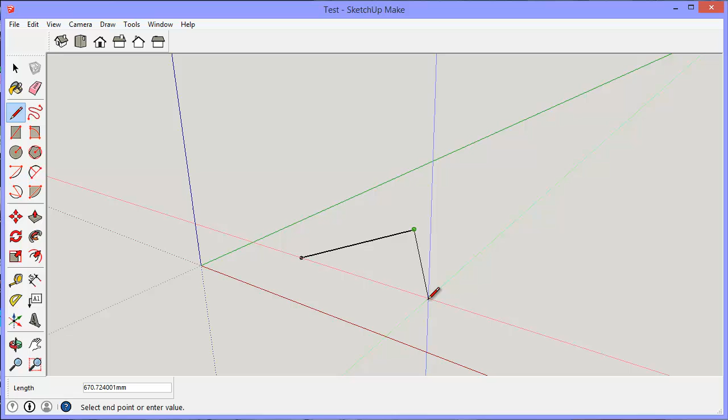Okay, looking at the pencil tool, I want you to consider some shapes here. I'm going to draw a kind of triangle-y sort of shape. You can see when I finish that last dot, when I click back on the green dot, it seals that shape in and it fills the middle with grey.

If I do something similar, but I don't actually finish the line and I press escape, you can see that the centre of this doesn't get filled with grey. The difference is that this is viewed as a complete face, a side, a piece of something. This one is just a line with nothing inside it. So if I wanted to do a push-pull here, I could make this into a three-dimensional shape. This one, I can't do anything with. You can see when I hover over it, there's a little no-arrow thing saying I can't do that.

So that's no good. You've got to make sure that the shapes you're drawing are sealed shapes. Okay, let's get rid of these. I'm going to show you two different ways. I'm going to get rid of that one by highlighting the whole thing and pressing delete.

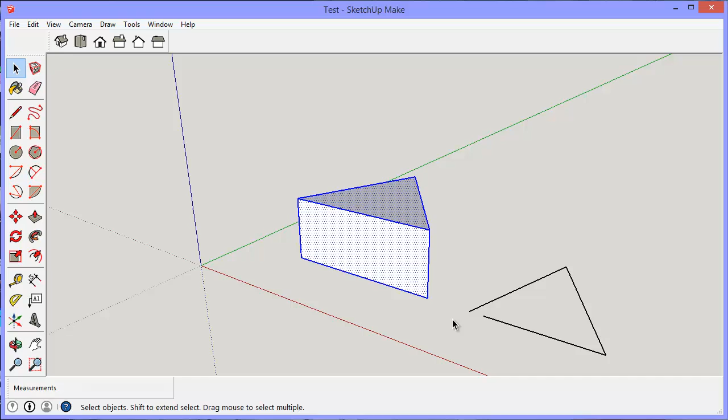This one, if I wanted to just get rid of a particular line, I can use the eraser tool and go over a line. Now it might be that I wanted to join these other ones back up again afterwards. So I could come back and finish off that shape, and now that's a solid shape. Now I could apply my push-pull techniques to it.

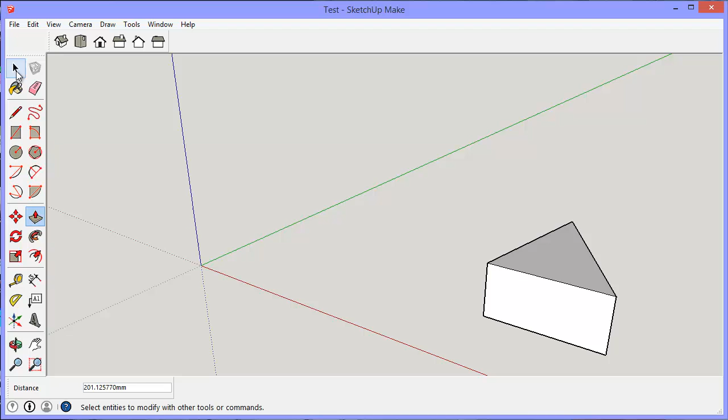I'm going to get rid of that whole thing again, highlight it, turn it blue, delete it out the way. Okay, let's look in a bit more detail at what I was talking about with different sorts of center lines and things shown. So there's my rectangle, I haven't bothered setting dimensions, it's all very rough. But with my pencil tool, if I highlight, you can see there's different things shown.

If I get to the middle of somewhere, I get something called a midpoint. The rest of the time, when it's just on the line, it's red. If it's off the line, it's no colour at all. Same over here, if I come along there's a midpoint, it tells me it's the middle section. There'll be one over here, and one over here somewhere. The corners go green because they're endpoints.

So it means I can lock my drawing to any of these things. If I wanted to draw from corner to corner, it locks to those points for me. Go from there to the midpoint. Go from this corner to this midpoint, and so on.

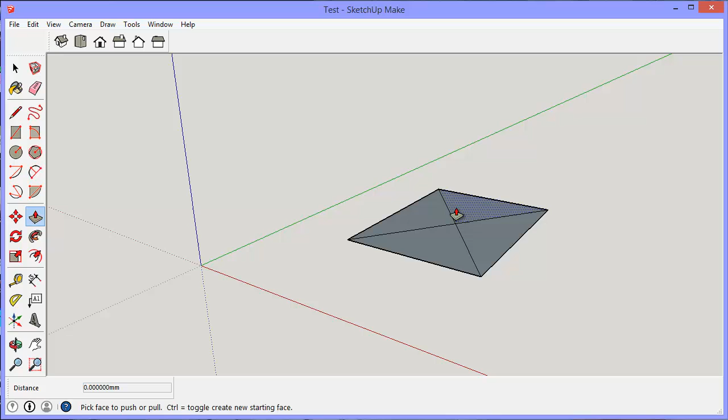What that allows me to do is, if I've got different sections, I could push-pull this one and make them different heights, push this one downwards, whatever - I've got a whole range of different things I can do with that shape using the push-pull technique. So it's very important to make use of where these midpoints and endpoints are to lock onto.

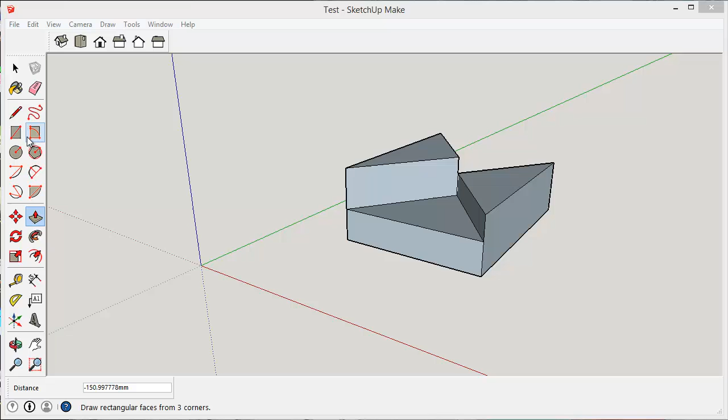But what if I wanted to do something a little bit more accurate than that? Let's get rid of these again, highlight it all, get rid of it. I'm going to draw myself a rectangle again, and this time I'm going to make it 100 by 100, so I'll type 100, 100, press enter. Okay, that's nice and small. Let's zoom it up a bit, move it around so we can see it better.

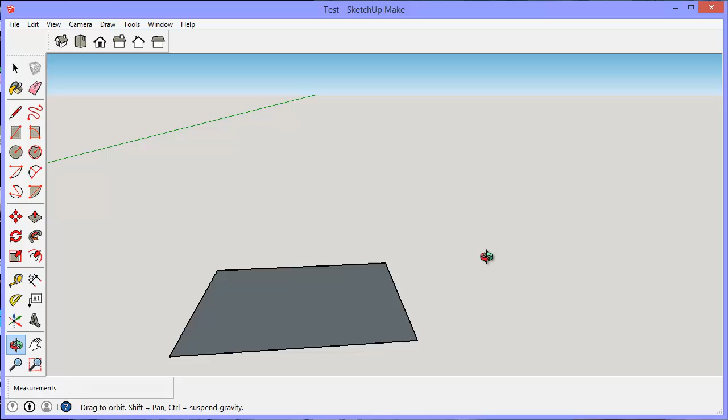Now say I wanted to go in and really be accurate and put a hole in it somewhere. So I'm going to show you another tool. Let's get this positioned a bit more nicely. Say I wanted to drill a few holes that were perhaps 20 millimeters in from an edge. Now that's quite difficult to do, or is it?

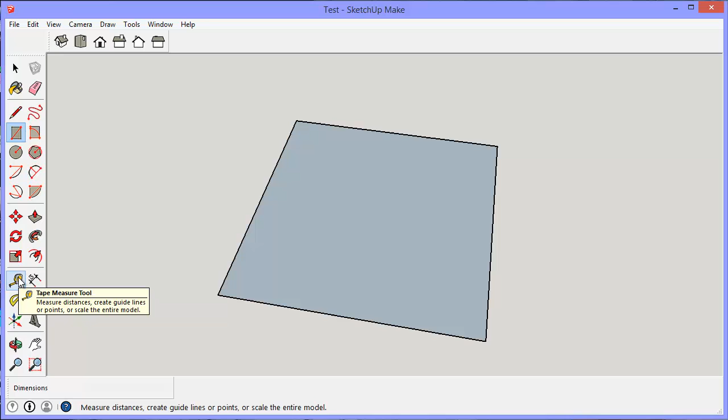I can come over here and there's something called a tape measure tool. I'm going to choose my tape measure tool and find an edge. It's actually found a center point, that's okay. I'm going to move in, click and move in from there. Now all I've got to do is tell it how many millimeters. If I type in 20 and press enter, you can see it produces a dotted line for me.

I'm going to come from the other edge, click on it, start moving in, press 20 - there's another dotted line for me. I'm going to come in from this top edge now, come downwards, press 20 again, press enter. You get the idea, it's putting these dotted lines in for me. These dotted lines are basically kind of construction lines - they can help me draw things.

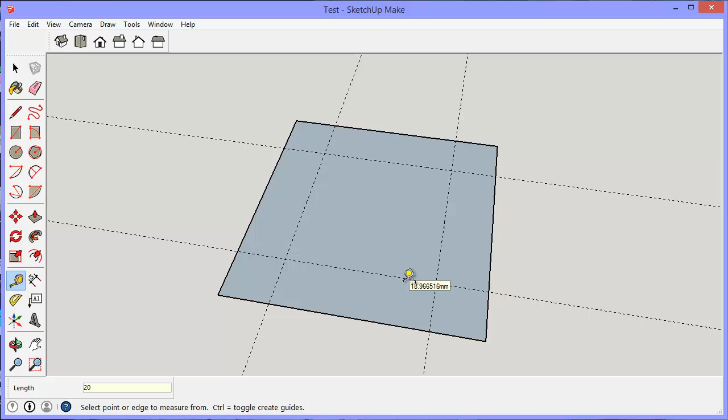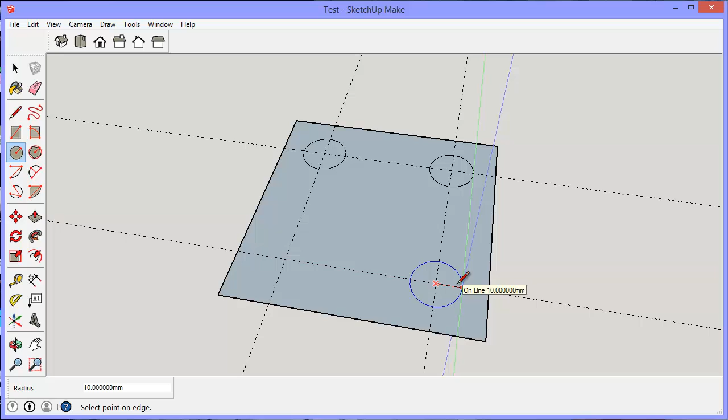So now, if I wanted to do some circles, I could put a circle on each of these points where they meet. I start dragging my circle out, but I might decide that circle wants to be 10 mil, so I press 10, come over to the next one. Now when I drag it automatically jumped to 10 because it remembered the last one. So all I need to do is click with my mouse button a second time and it already knows the right dimension for me. If I wanted to change it I could just type in again or drag it bigger.

So now I've got those 4 circles on my board. If I don't want to keep these construction lines on, I'll choose my little eraser and go over these lines - you can see they turn blue and disappear. I don't need them anymore. I might leave them on if I want to, but I don't think I needed them. I'm going to now see what I can do with these.

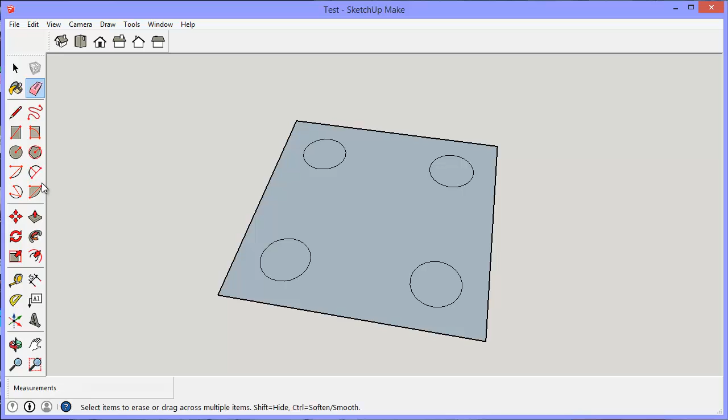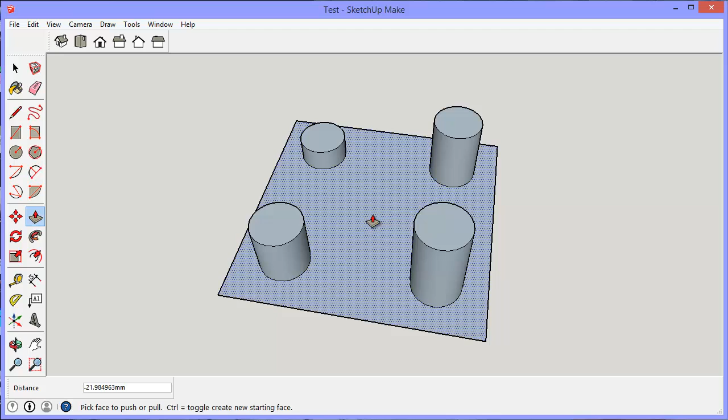So if I wanted to, I could make my whole thing come upwards and have the holes cut out. If I do Control Z, it takes me back one step. So perhaps I wanted to bring these up instead, or bring them up to different levels. Maybe I wanted to choose this one and bring it up, or take it down the other way.

So I've got lots of options as to how I can manipulate these three-dimensional shapes when I start drawing them. Basically all I'm doing is making use of different geometric shapes and adding them all together - I'm combining them.